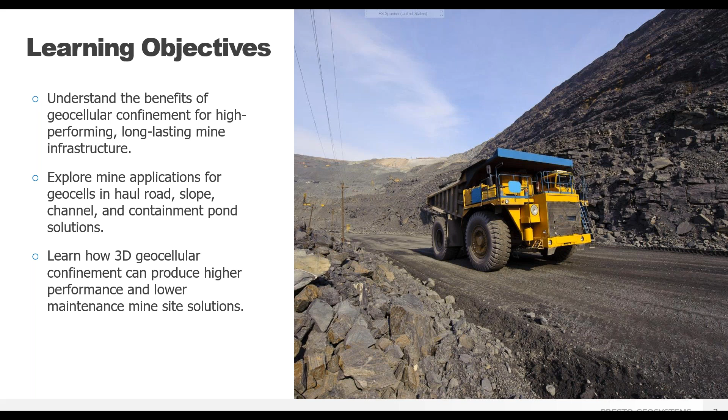What is value engineering? First thing most people think of when hearing value engineering is cutting costs. And although cost is a major project factor, value engineering has to be about maximizing value, not simply reducing cost. A reduction in cost could result in disproportionate reductions in functionality, and then a cost reduction could result in reduced value. Value engineering identifies opportunities to reduce costs while improving functionality. The aim is to deliver the project's functional performance requirements at the lowest cost, preferably the lowest whole life cost.

For construction projects, this means an investigation of materials availability and cost, construction methods, transportation, project-specific restrictions, plus stakeholder issues and benefits, environmental and sustainability impacts. Adoption of a new and innovative material or method, such as substitution of materials and methods with lower cost alternatives, can significantly reduce costs, but they must do so without reducing functionality. That's where we step in to help you, analyzing that total package for a value engineering mine solution.

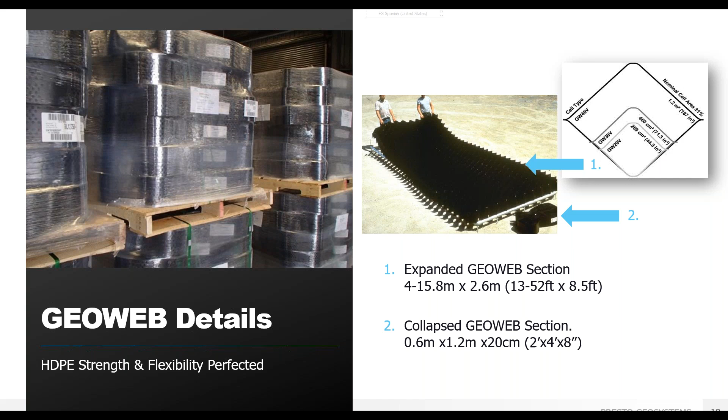The infill, or what you put into that container, is the second important attribute of the GeoWeb system. An important benefit of the system is that low-quality aggregates, sand, or on-site reclaimed material can be used to fill the geocells. Using reclaimed sand or aggregates can save a significant amount of money on materials and transportation costs.

We can also remove fines if drainage is desired, as the geocells provide the confinement and aid compaction of cohesionless soils. Without fines, we can significantly improve drainage and let water flow freely through the system, preventing pore pressure buildup and overall cross-section failure.

The ability to use those low-quality sands and aggregates with friction angles in the 20-degree range really sets the GeoWeb system apart from geogrids and geotextiles. Those products require high-quality materials with high friction angles to achieve their optimal performance. With the GeoWeb system, materials with low friction angles are fine, as the GeoWeb panels reach their full potential even with these poor materials, which can provide significant cost savings to you. The GeoWeb system can often reduce the cross-section required by half.

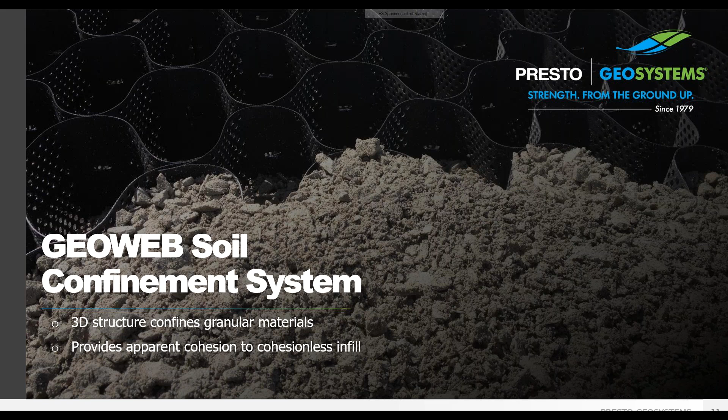In order for a geocell system to perform uniformly, it's critical that both the factory welded junctions and the field joined junctions that connect individual panels perform at a level commensurate with that of the cell walls. The 3 primary elements of the system, the cell walls, the internal junctions and the connectors, have to perform uniformly as a complete system. So any incremental improvement in one characteristic, such as cell wall stiffness or ESCR, is only valuable if a complementary improvement has been made across the other components of the system.

GeoWeb is manufactured using a proprietary blend of high-quality virgin HDPE. Our proprietary formulation has stood the test of time for more than 40 years. And for most typical sites, GeoWeb will retain its durability for greater than 100 years, with lab testing indicating 149 years without degradation, even at full exposure to the elements. We stand behind our numbers so you can deliver certainty in the solution and build with quality materials you can trust. Additionally, GeoWeb and all our accessories are 100% made in the USA under strict quality assurance and environmental control processes.

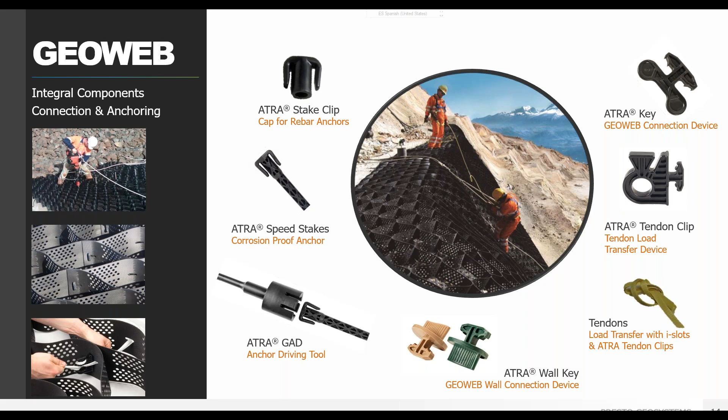The system components are all the supporting pieces that help the GeoWeb protect the surface and base layers and also ensure relatively uniform performance of the interconnected system, thereby protecting against the damaging effects of non-uniform deformation and differential settlement in response to applied loads. The components make it safer, faster, and easier for installation.

The ATRA-key is the first component for a completely integrated system, connecting each individual panel of GeoWeb into a single web that covers your slope. It allows for faster installation of GeoWeb and will last the lifetime of the project, ensuring that the GeoWeb system will not fail under anticipated loads. The specific engineering values of the ATRA-key will ensure the system holds up to loading over time without the corrosion seen in staples or the failure of underperforming cable tie systems.

Our spec sheet calls out the specific engineering values for this patented connector, and the ATRA-key requires no special tools, generators, or compressors like staplers would, nor any three-handed acrobatics like cable ties or two-piece connectors. All the power of the ATRA-key with a simple insert and turn positive connection.

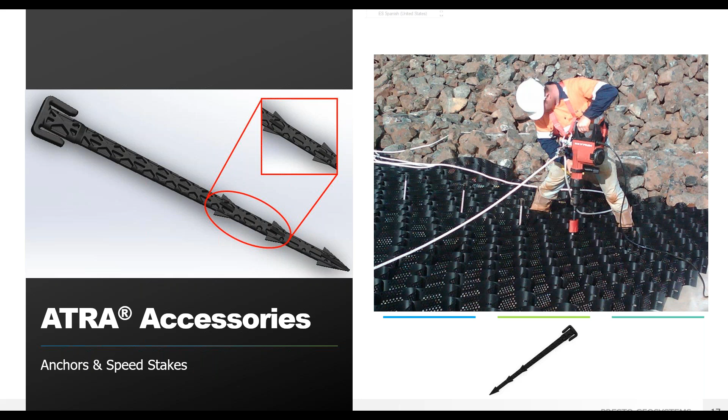For steep slopes, a slope where the native soil is highly erodible, or over a surface that cannot be punctured, such as a liner, tendons can be used. The ATRA tendon clips transfer the load from heavy infill material to the tendons and crest anchorage system. Only the ATRA tendon clip is specifically designed to fully transfer safely and securely the forces placed upon the geocell.

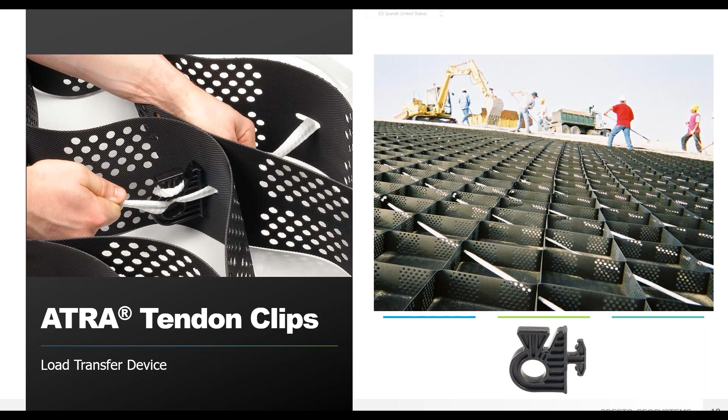Every accessory and every feature has been designed and tested to specifically work together, so we go from problem to design to construction solution with a system where the modeling replicates real-world forces. Now let's talk about how to take advantage of the benefits of geocell confinement. The first application we'll highlight is in load support.

The GeoWeb system stabilizes unstable soils, vertically and horizontally, and in load support applications offers various benefits for mine clients. GeoWeb geocells were invented for supporting heavy loads over soft soils, the perfect solution for haul roads in mine installations. Before giving some specific examples with case studies, I'll explain how and why GeoWeb geocells work so well for load support.

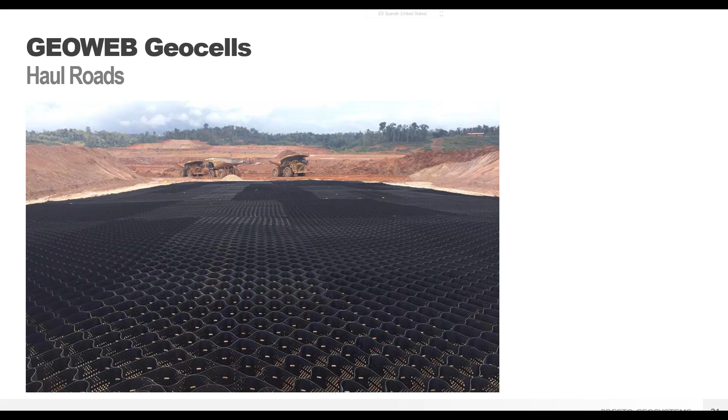GeoWeb was invented for solving a military problem: how to cross beaches with heavy military equipment. The Army sought a quick-to-deploy road solution, and a Presto engineer, Gary Bach, collaborated with Steve Webster of the Waterways Experiment Station to weld strips of polyethylene and form the first geocells.

The system evolved to include UV stabilization and other improvements such as perforation, texturization, and connections, but the concept of geocellular confinement and the particular strength properties of HDPE have been proven by more than 4 decades of GeoWeb load support. Likewise with the use of low quality and low friction angle infill.

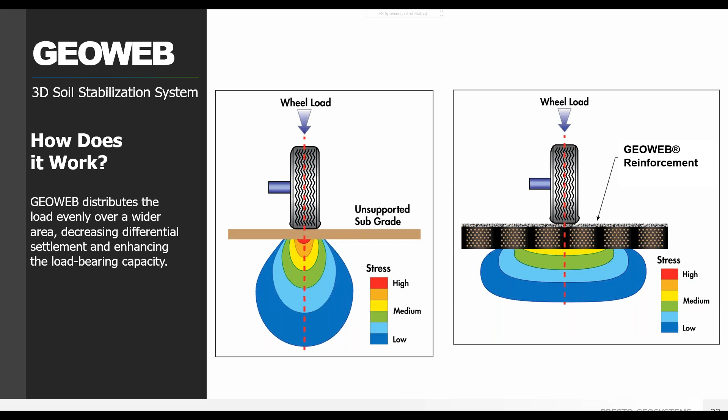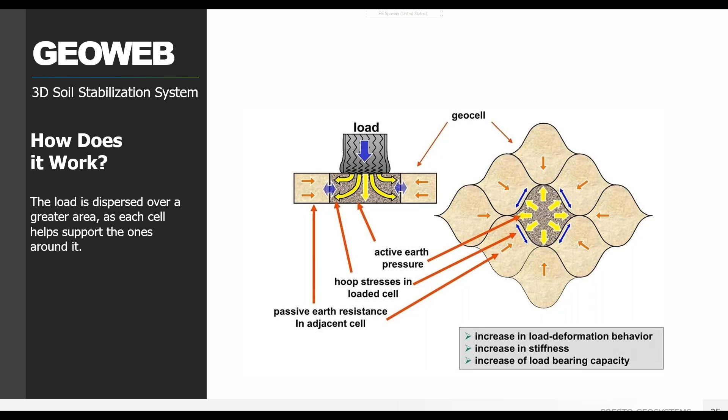The strength of the seams around each cell, the material properties of the individual strips, and the connection method between panels are all important factors in determining how the geocell system can improve load-bearing capacity. Strong seams, semiductile resin properties, and integrated connections are all critical to a well-performing system. By eliminating that lateral particle movement, the GeoWeb can stabilize the surface, eliminating the need for constant maintenance.

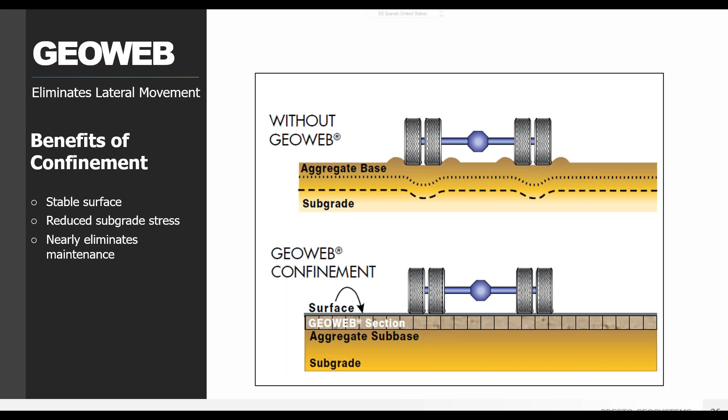Here we see the impressive load support benefits of a standard AASHTO H25 loading parameter, 80,000 pound loaded dump truck, on a partially filled GeoWeb panel over a soft subgrade. We see how the cells push back against each other to help support that load, and only the adjacent cell needs to be filled for that support. A great benefit to using the GeoWeb system is you do not need to have every cell completely filled before your road is usable. You can reduce construction time and materials with this approach.

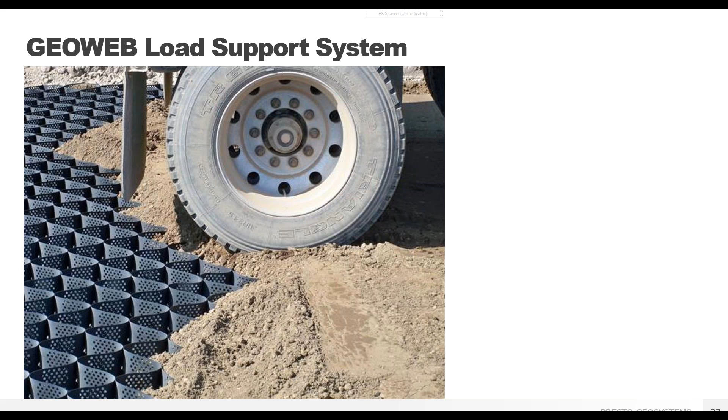The GeoWeb system provides less rolling resistance, less required maintenance, less expenses needed for fuel, and less structure required to support those loads, all with better production, better cycle times, better operational costs, and better installation. A great value engineering solution for your site access and haul roads.

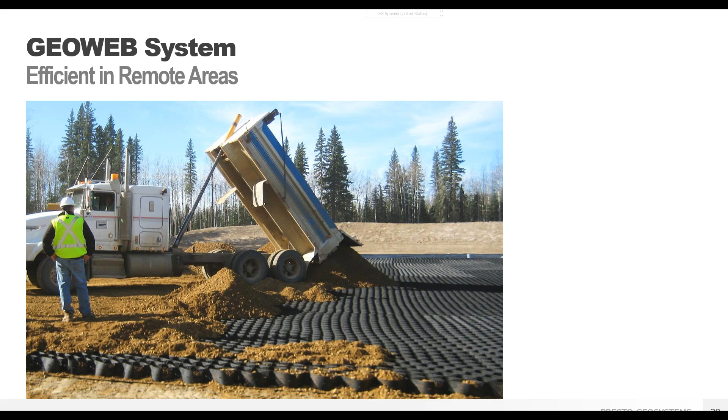The 3D structure functions well in remote areas where clean aggregate is scarce. Compact GeoWeb sections ship efficiently to job sites and require less trucks to transport the materials. On-site sand infill, in this example, is used so that costly aggregates won't be necessary. Nearly any locally available granular infill, sand, or even waste rock could serve for the GeoWeb geocells in your projects. In the majority of cases, the GeoWeb system can also reduce the cross-section depth by up to 50%.

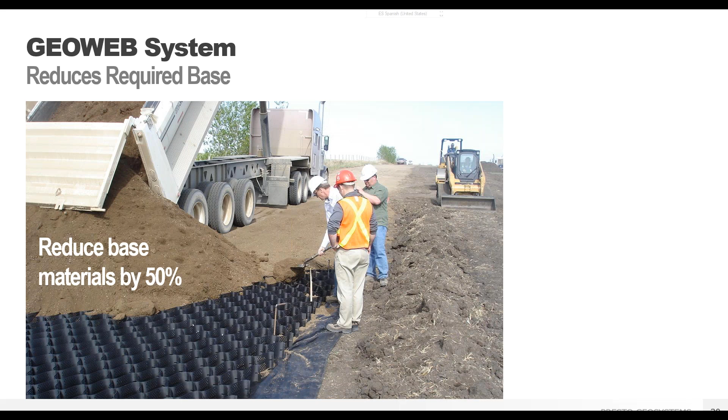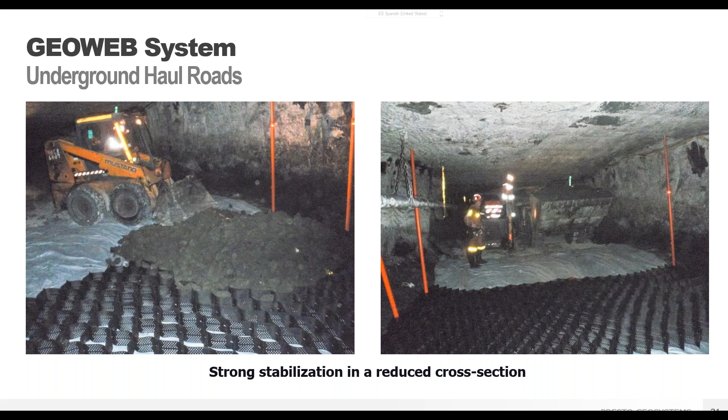GeoWeb allows stabilization with a reduced cross-section, ideal for your underground haul roads. Let's look at a haul road example for a specific case study. This case study is for a mine in South America and a great example of the power of geocells for a value engineering solution.

GeoWeb geocells were incorporated into the design of the haul road at an active mine in Suriname, with heavy loading over soft subgrades and a local scarcity of quality angular aggregates. The prepared subgrade strength exhibited a California bearing ratio, or CBR, value of 2.5%, consisting of saprolite and clay.

Anticipated loading included the CAT 785 haul trucks, which are 275-ton vehicles, and the haul road useful design life of 10 years at 250 movements per day. Geocells offered a value engineered design option with multiple benefits. The sticky clay soils made the road impassable with every hard rain, and adequate aggregate materials for a standard construction solution were not to be found.

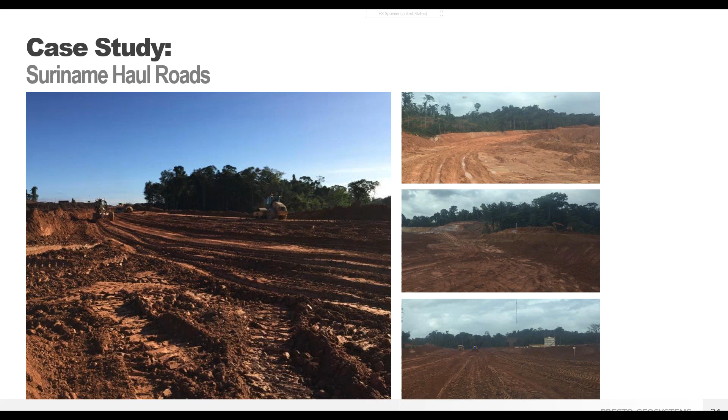GeoWeb geocells offered that value engineering solution with just one layer of 6-inch or 15-centimeter geocells, being able to support the heavy haul truck loading over soft subgrades and reduce the total thickness to 30 inches, reduced from the 60 inches suggested by standard design guidelines.

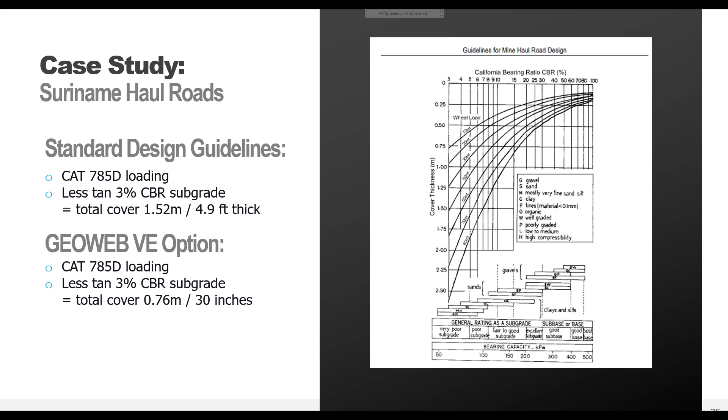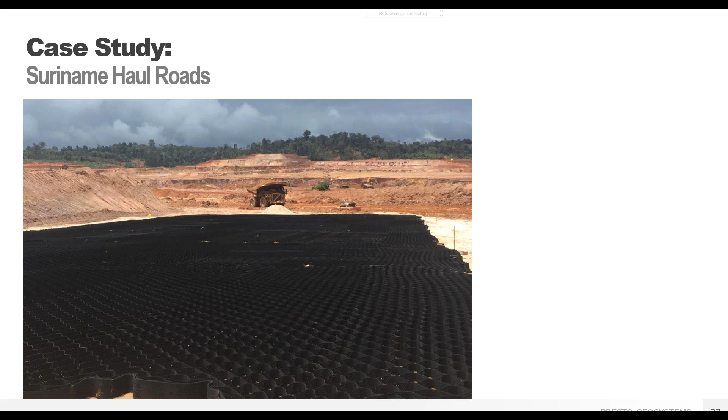Geocells dramatically increase the shear resistance of the infill, which allows the use of lower quality fill to carry concentrated loads that would otherwise require crushed aggregate to prevent localized near surface shear failure. Here's that one 6-inch layer of geocells being installed. For an efficient and cost-effective solution, the infill was locally available coarse river sand, known as small miner's residue, and the GeoWeb haul roads function well, even with the hard tropical rains.

The results of the GeoWeb installation offered notable benefits. A great reduction in the total cross-section needed, reducing it by 35% with a coarse sand wear surface, and by 50% with an aggregate wear surface. The estimated savings per kilometer are around $150,000 US, about $100,000 per mile in savings. Since installation, there has been a reduction in road maintenance costs of over 65%.

There are no downtimes due to rains, and there have not been any deep ruts observed since install, multiple years now. There's less vehicle maintenance and less fuel required, better productivity and operational costs, safer site conditions, and this expansion opened before the scheduled date and under budget. All in all, a very satisfied client.

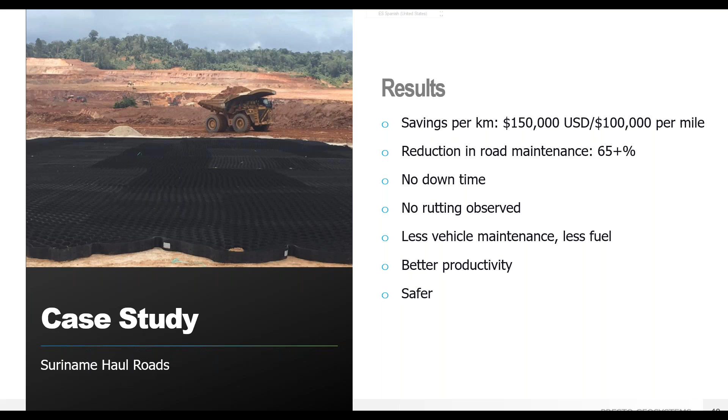Project calculations included an analysis of bearing capacity improvement to evaluate the combined benefits of lateral confinement from geocells in conjunction with the tension membrane effect of the underlying high-strength woven geotextile to confirm the proposed approach would meet design requirements. The analysis indicated the stabilized section would offer a substantial increase in the allowable bearing capacity over existing subgrade conditions, without which it would have an allowable bearing capacity of around 20 to 30 psi at best.

An analysis of hoop stresses under working loads was also performed to verify the geocell system components would be able to withstand the demanding load requirements. Hoop stresses were compared to the ultimate tensile strength of the perforated cell wall, as well as the strengths of the internal and mechanical junctions.

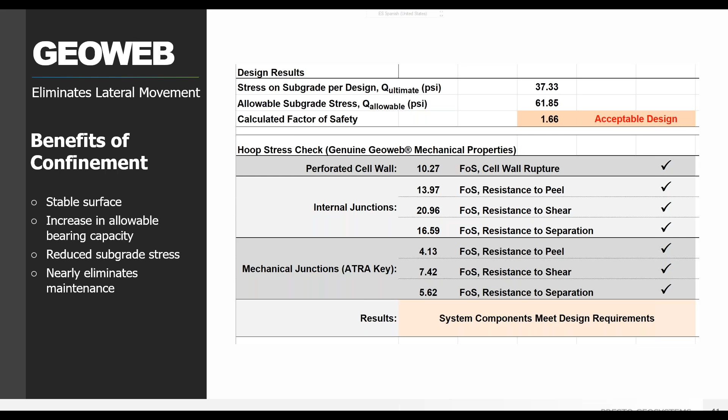In the case of the junctions, ultimate strengths for all three primary modes of potential junction failure, shear, peel and separation or splitting, were compared to the fully developed hoop stress under working loads to calculate factors of safety for each mode. For cell wall, the factor of safety against cell wall rupture was calculated. As shown, all of the system components were verified to meet the design requirements.

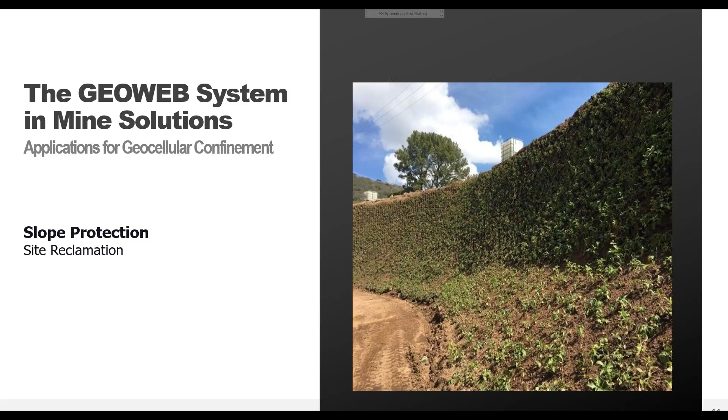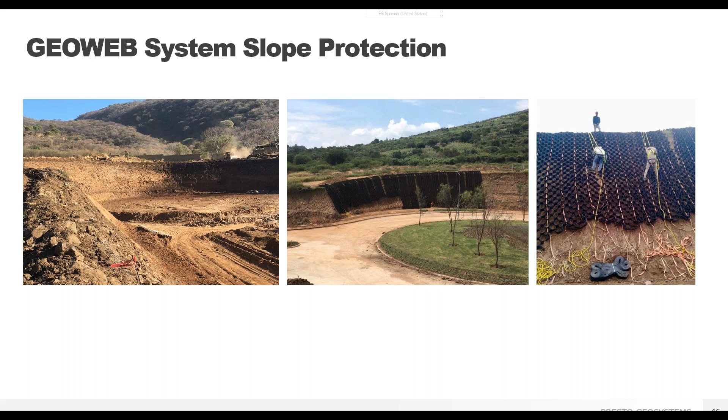Our next application for GeoWeb will be for slope protection. The GeoWeb system stabilizes unstable soils, and in slope protection applications, that means we can control erosion while at the same time sustaining vegetation with steep slope angles. The GeoWeb system allows flexibility in a mine slope reclamation solution and allows vegetation of tall, steep slopes that would otherwise not be able to sustain vegetation.

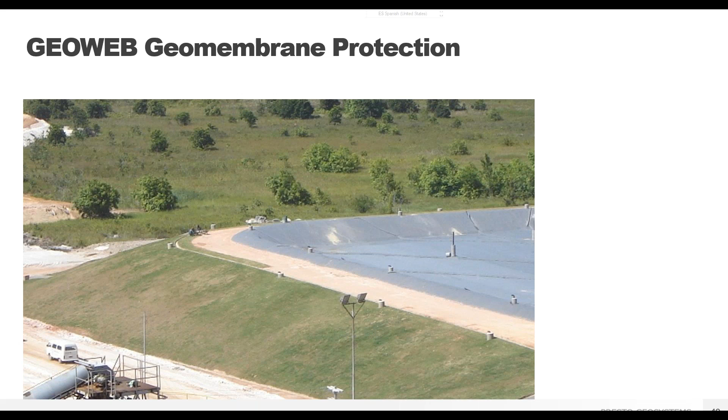GeoWeb also allows you to suspend a protective layer to vegetate or to hard armor over geomembranes without the need to perforate the liner for anchors. And as you see here, it's able to sustain vegetation and control erosion in that protective layer. Here's another example of the GeoWeb system with tendons over geomembrane.

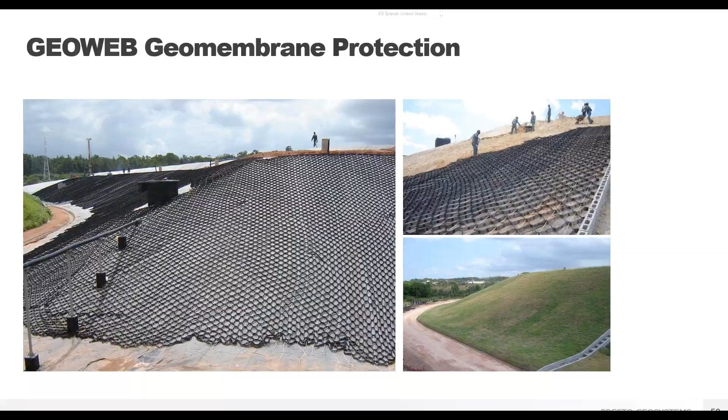The anchorage system with ATRA tendon clips allows for a safe and strong installation without the need for anchor stakes or perforation. The ATRA tendon clips transfer loads from the geocell wall to the tendon and the tendon to the crest anchorage, whether that be deadman pipe as you see here or a type of earth anchor.

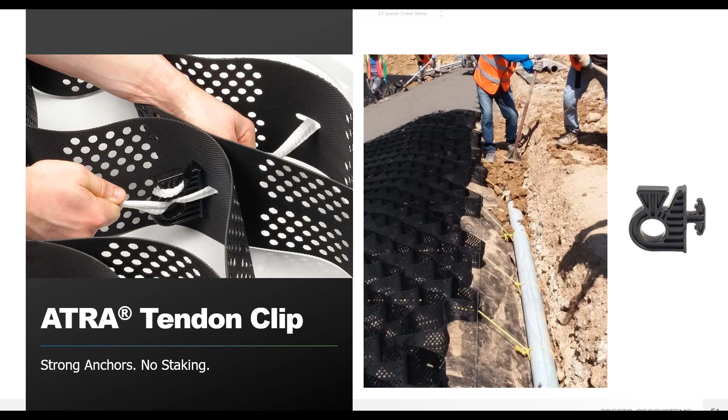Here's a case study from a mine slope at the foothills of the Canadian Rockies. The soft shale slopes were degrading with noticeable scour and erosion in an area above an MSE wall supporting a new coal conveyor. A long-term stabilization solution was critical for this project. We worked closely with the engineer of record, assessing system options to include anchorage for the loadings, for snow loadings.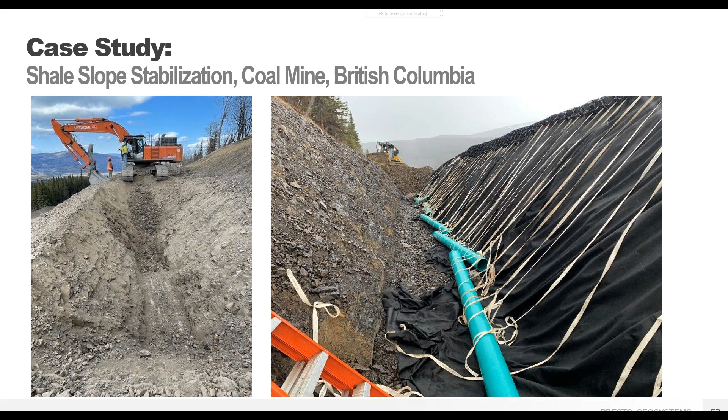A tendon GeoWeb system was designed with the ATRA tendon clip load transfer devices and a deadman crest anchor for this 1.4 horizontal to 1 vertical cut slope. Here we see the tendon tie-off in the anchor trench, as well as the non-woven geotextile for separation. Here the anchor trench is filled with on-site material, and you can see part of the conveyor system at the toe of the slope in the photo on the left.

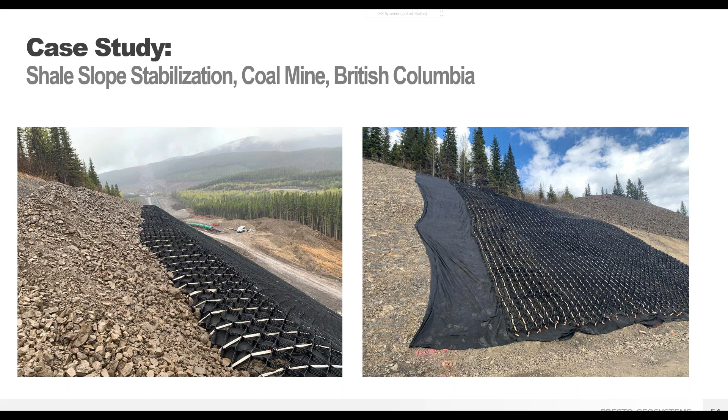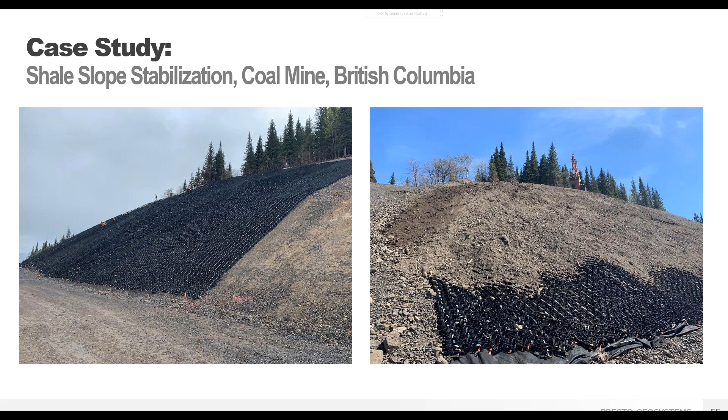Much of the GeoWeb slope protection system can be pre-assembled on the crest of the slope and then expanded downslope for infilling. Once the GeoWeb slope system is connected and placed, it is infilled from crest to toe. The GeoWeb sections were filled with topsoil, and the area was seeded for vegetation growth.

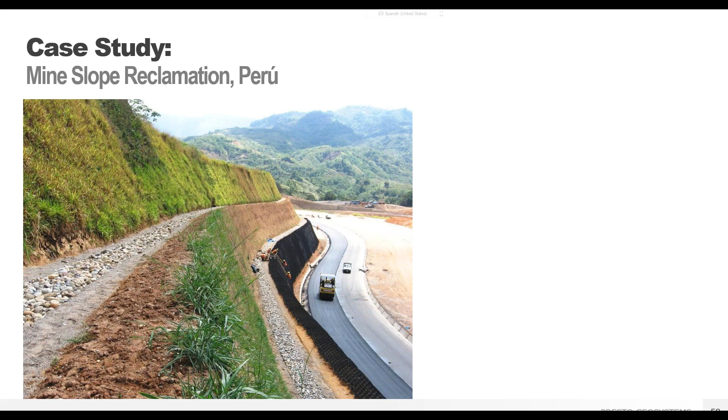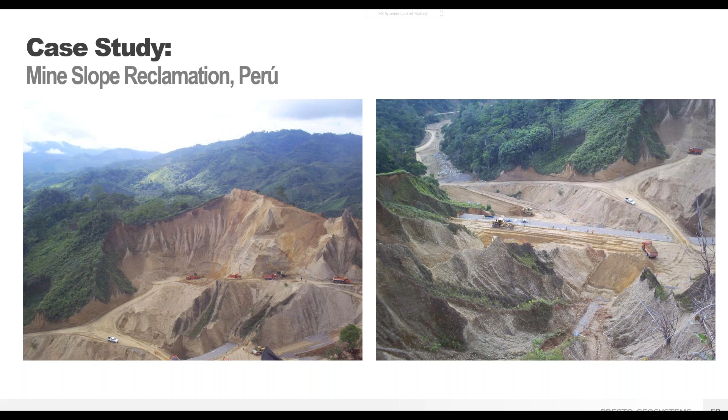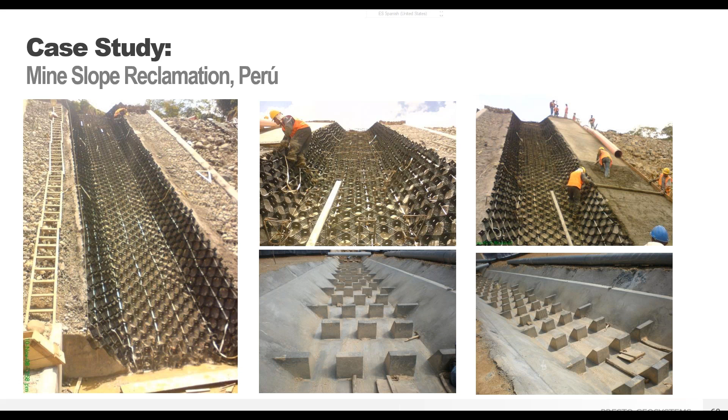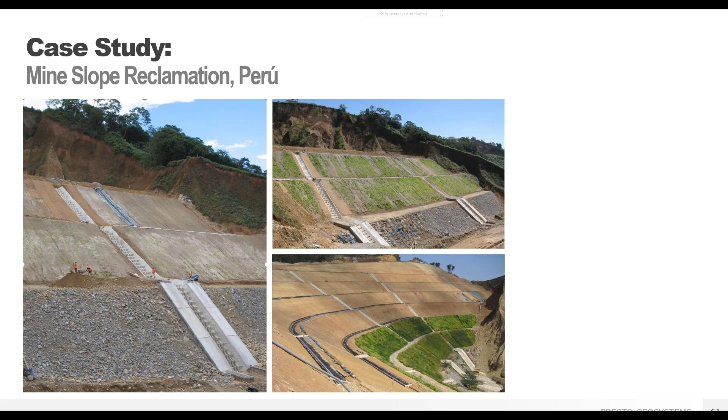Here's another case study for mine slope reclamation, this one in Peru. As you can see, the slopes are very steep, with cut slopes having angles greater than 70 degrees in some cases, and much erosion. A complete and complex solution was required, including the design and construction of integral rainwater channels with energy dissipators, all with the goal of managing stormwater and preventing slope erosion with little to no maintenance long term. Long-term protection and a complete solution to control erosion, reclaim mine slopes, and control stormwater, all thanks to the GeoWeb system.

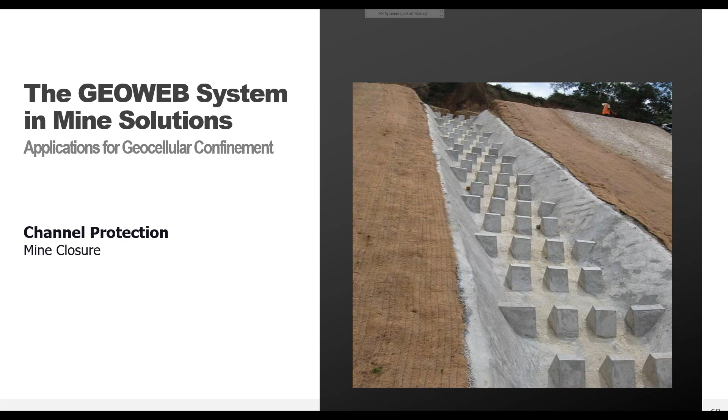The process for building up a channel protection goes something like this. To begin, we have our channel with standard dimensions and side slopes. Depending on the infill, a geotextile separation layer may be required. Then the GeoWeb panels are put in place. Note how the panels typically have a crest anchorage at the top of the side slopes, as well as a horizontal turn at the top. This is important for the anchorage and to prevent water from flowing under the panels and scouring it.

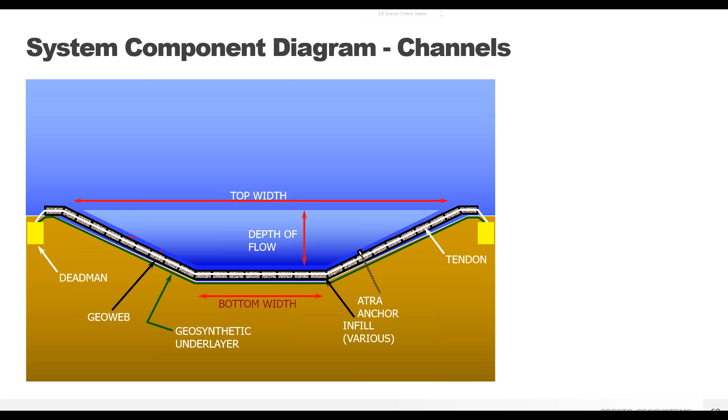The use of the 3D GeoWeb channel protection system is much more effective than two-dimensional solutions that are subject to scour or lifting. The fill material that's confined in each flexible cell is protected against erosive forces, making the entire channel or embankment more stable. Two-dimensional solutions such as erosion control blankets or cementitious blankets do not protect the channel from the hydraulic forces of the water, so the channel can fail even with that 2D protection system in place. Those systems also may be prone to uplift.

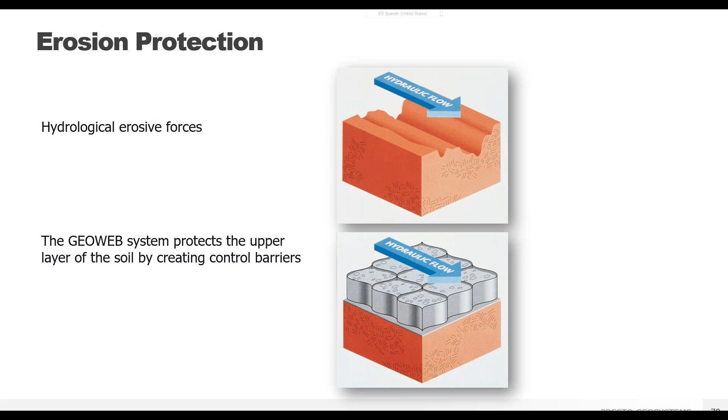The GeoWeb channel system provides protection with a variety of anchorage and infill options that best suit your project needs. Here we see channels with vegetated infill, aggregates, and concrete. Geocells improve the hydraulic performance of conventional channel protection materials. Presto has done extensive testing with the hydraulics lab at Colorado State University.

And their lab has a static drop of over 80 meters, about 260 feet, for nearly limitless flows through their lab flumes.

The CSU tests gave us formulas to calculate solutions for flows in vegetated GeoWeb channels up to 9 meters per second, or about 30 feet per second, in aggregate channels, reducing rock size by 2 to 10 times compared to riprap and the Abt-Johnson or U.S. Army Corps of Engineers formulas, and in concrete channels with flows of more than 11 meters per second, or over 36 feet per second, with the GeoWeb system surpassing the flow limits of the lab flumes.

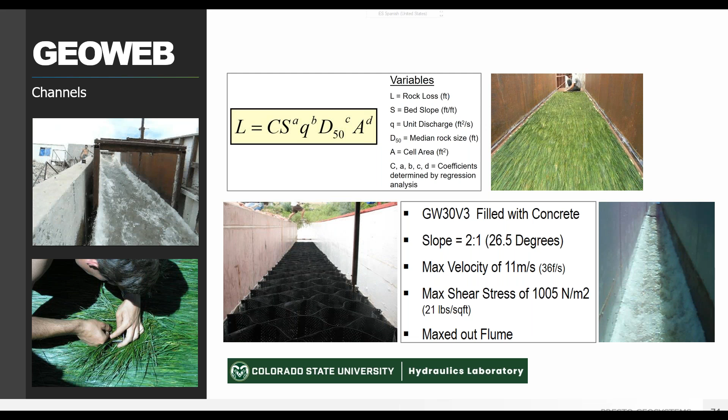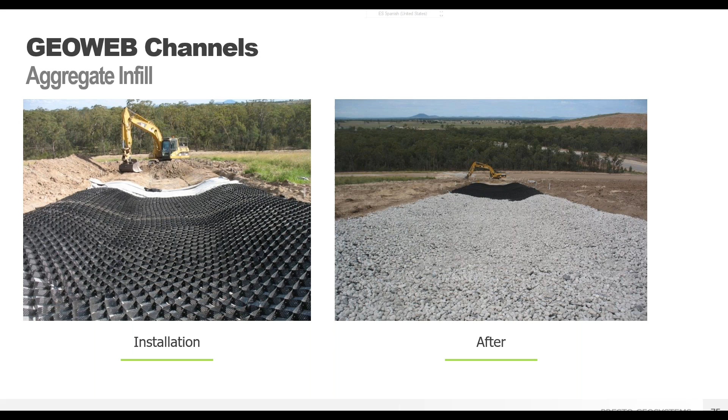Vegetated channels are not typical solutions for mine installations, and aggregate channels are often used for mild slope installations, like this example of an outfall channel for Rio Tinto. Or this example with shallow embankments in Arizona. The GeoWeb channel infill can be waste rock, readily available on site, and less costly than importing any fill.

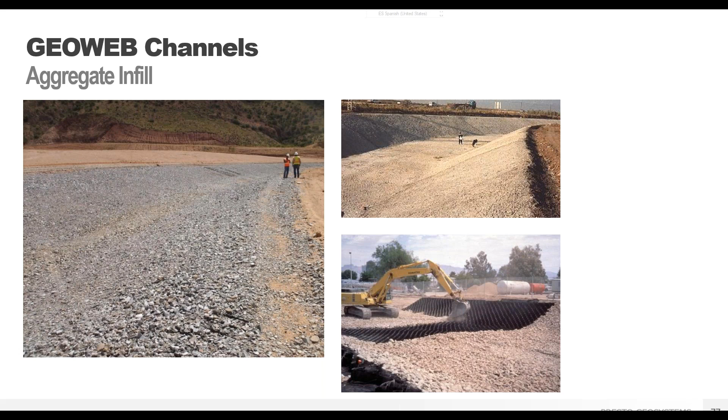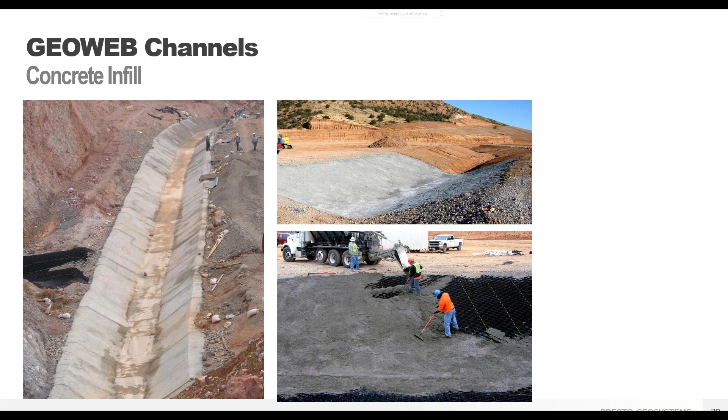For extreme flows and a permanent worry-free solution, concrete infill is recommended, as used in this spillway project in Peru. That concrete recommendation is especially important at mine closure or when limited site observation and access is available. Here are some more examples for remote site installs from San Andreas and Tyrone. And there are many, many concrete GeoWeb channels at the Yanacocha mine sites.

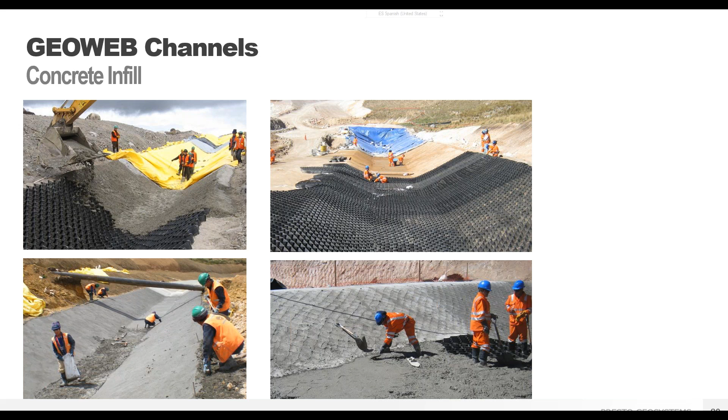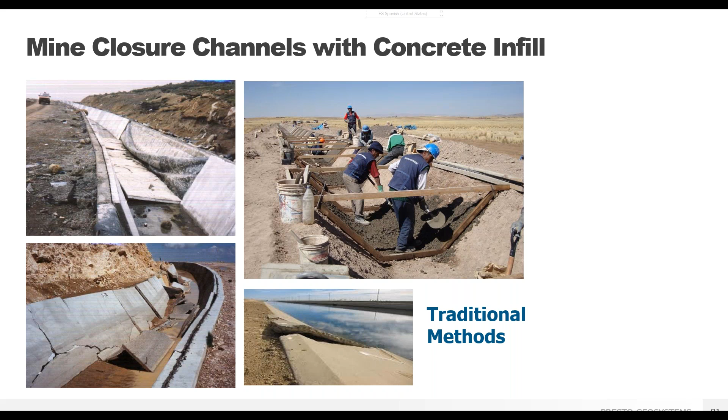Traditional methods often open the possibility to failure points, in addition to having longer construction times. If there's differential settlement or seismic activity along the channel, an inflexible solution should not be chosen. We're going to look at a case study for a high flow mine channel in Guatemala. GeoWeb allowed for a resilient and fully armored seamless channel without the need for expansion joints and the potential failure zones seen with traditional poured channels, all with a reduced cross-section in an active seismic zone.

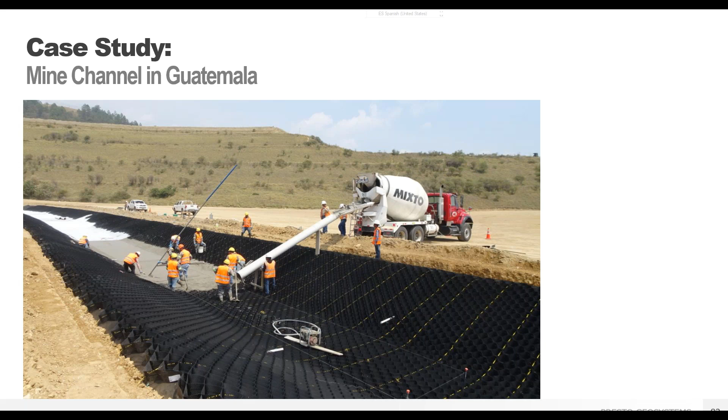GeoWeb geocells can be incorporated to handle high-flow stormwater in remote locations, and their long-term resiliency makes them ideal for mine closure applications where environmental restrictions hold sites to consistent and permanent high performance. Yet site access often only allows for occasional monitoring post-closure.

Expanded durability standards are especially important with increased frequency of record storm events, and if either seismic activity or differential settlement is expected. As our case study will discuss, this mine site in Guatemala experienced record storms and strong seismic activity, and the geosynthetically enhanced channel armoring delivered consistent performance that stood up to the challenges.

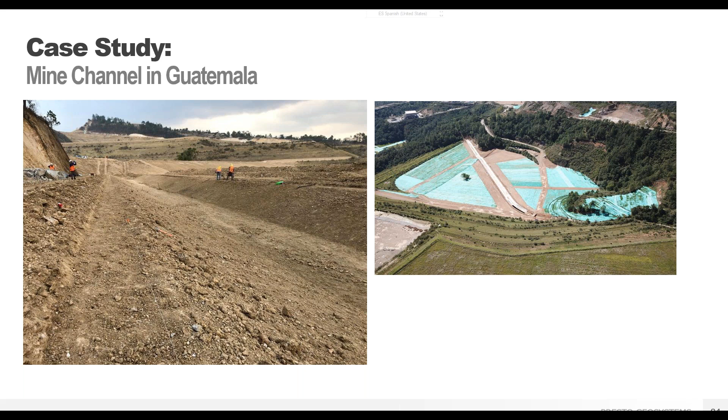The channel had anticipated hydraulic flow of 425 cubic feet per second, about 12 cubic meters per second, and about a 5.14 meter per second velocity over a length of 400 meters. There were rapids included in the channel, and the client wanted to allow for excavator entry as needed for future cleanout. The mine site was originally considering an 8-inch or 20-centimeter reinforced poured concrete channel and looked to optimize design while maintaining a trapezoidal channel formation.

While design calculations supported a 4-inch geocell system to still allow that excavator support and match the resiliency needed for this channel, the mine site preferred to split the difference with a 6-inch depth for additional factor of safety. This was still 2 inches thinner than originally budgeted, so it already offered considerable savings in concrete costs.

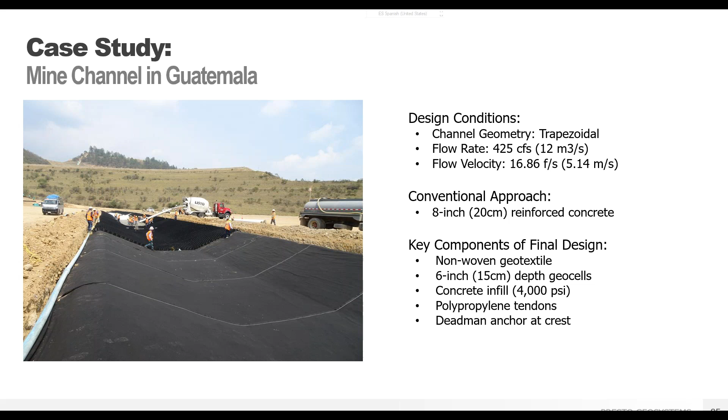The design included a non-woven geotextile as a separation layer, 6-inch geocells with polypropylene tendons, and a load transfer system with 4,000 psi concrete. The GeoWeb channel protection design incorporated our strong polypropylene tendons, the ATRA key connectors, and the ATRA tendon clip load transfer devices. Here you see the connection with the deadman anchor with the tendons.

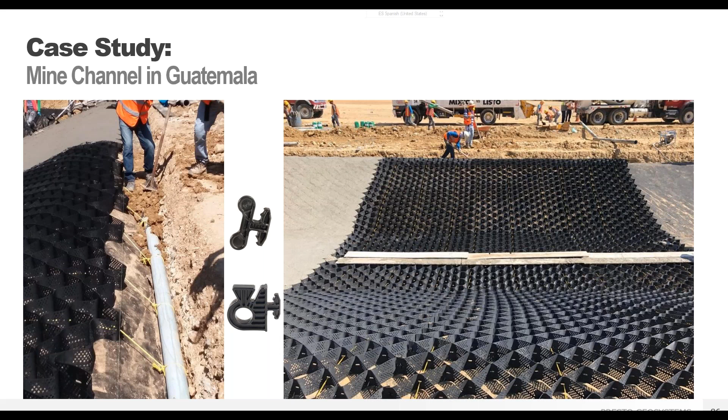First, the channel bottom was filled, and then the side slopes working from top to bottom. Note the yellow tendons and the deadman anchor at the crest. These components are determined project by project based on the details of the specific channel. Also note the difference in concrete color, with a previous pour showing as the light white infill color and the current pour showing as the darker gray.

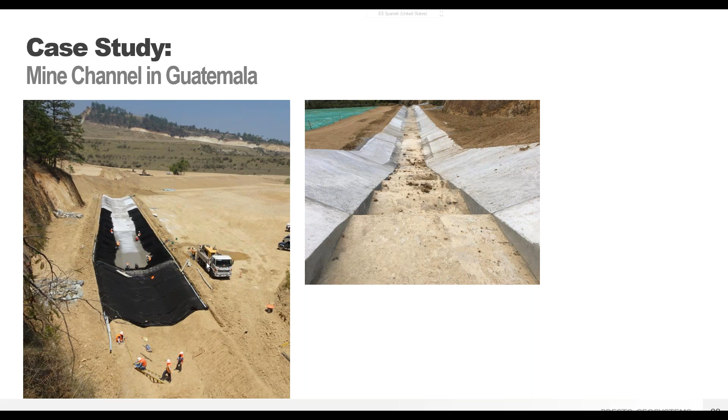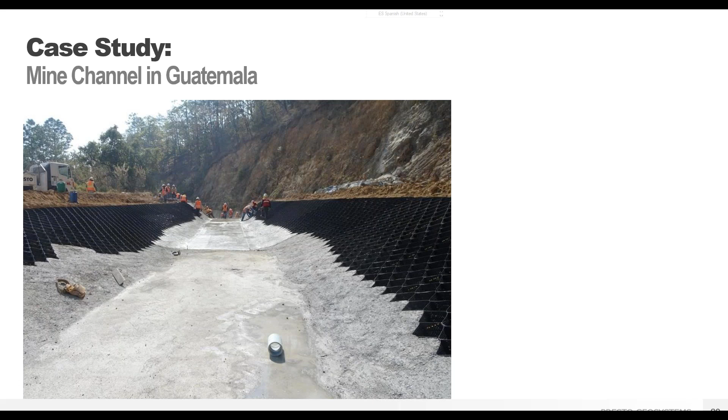Rapids were incorporated into this part of the channel design, with the GeoWeb geocells transitioning seamlessly into the structure. And here joining the rapids with the rest of the GeoWeb channel. Again, incorporating multiple pours without any issues of that transition. Here's a drone view of the GeoWeb channel installation with the rapids here.

The GeoWeb channel protection system allowed for a resilient and fully armored seamless channel without the need for expansion joints and the potential failure zones seen with traditional poured concrete channels.

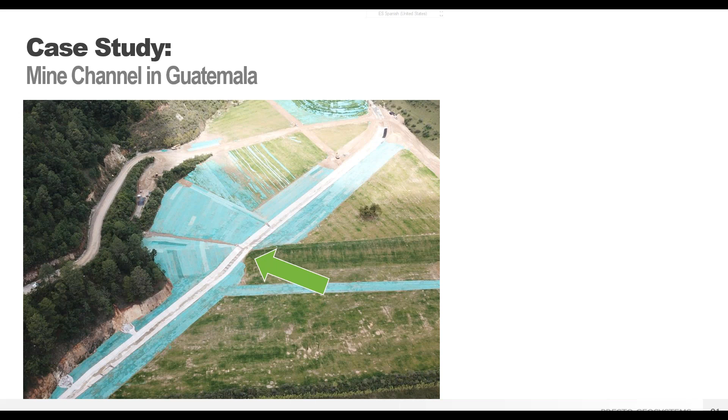After multiple years of performance without incident, even with record storm events and strong seismic activity in the area, with soil saturation, overflowing rivers, and landslides, the GeoWeb channel continues to perform as expected. Geocells with concrete infill have the long-term resilience and economy to be considered a best practice and are considered among the solutions with highest long-term performance results from the U.S. Bureau of Reclamation's 10-year canal lining study.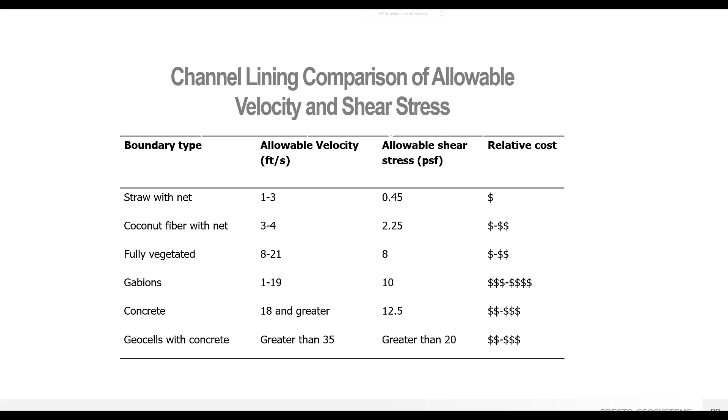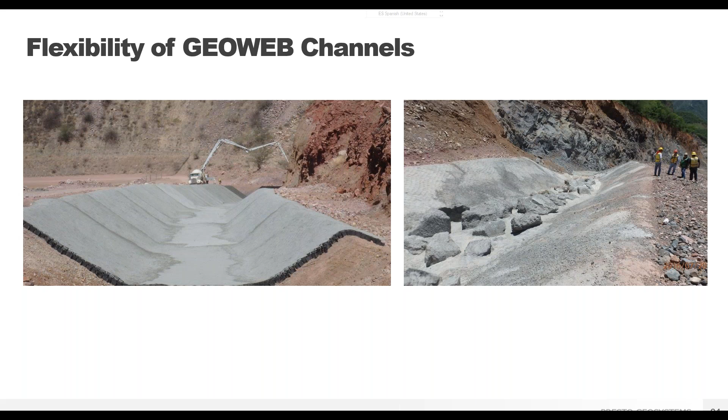Here we see a comparison of allowable velocities and shear stresses for various channel lining alternatives from the United States Department of Agriculture. The GeoWeb system provides protection and flexibility, as shown in this mine closure channel in Mexico, using big riprap fixed in place with grout for a rockfall area. Or with these rapids in a Peruvian mine installation. Again, incorporating those energy dissipators as an integral part of the GeoWeb concrete pour.

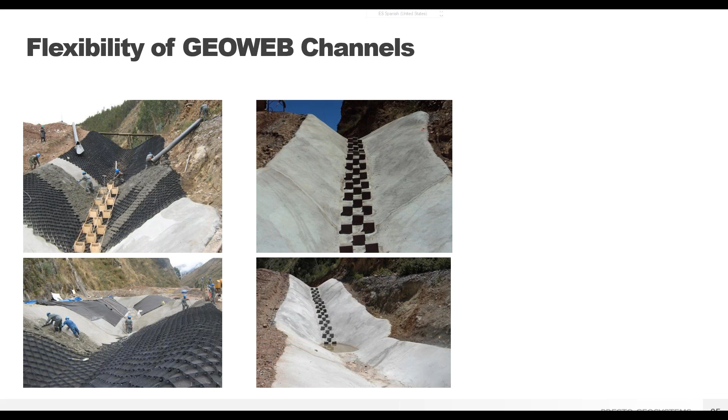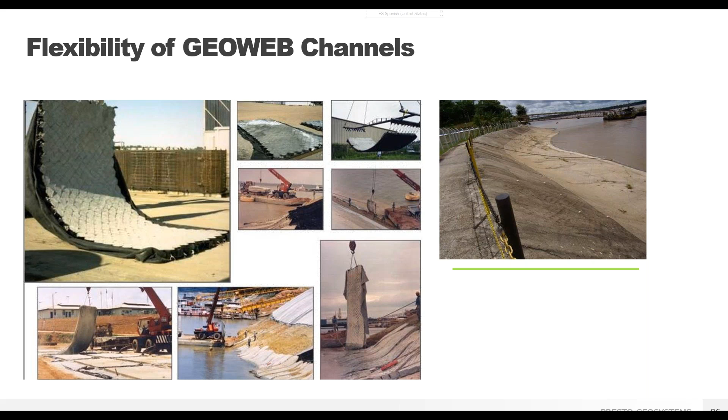The flexibility of channels with various options for anchorage and installation, and various options for infill. All in all, a system of complete channel protection for your project needs.

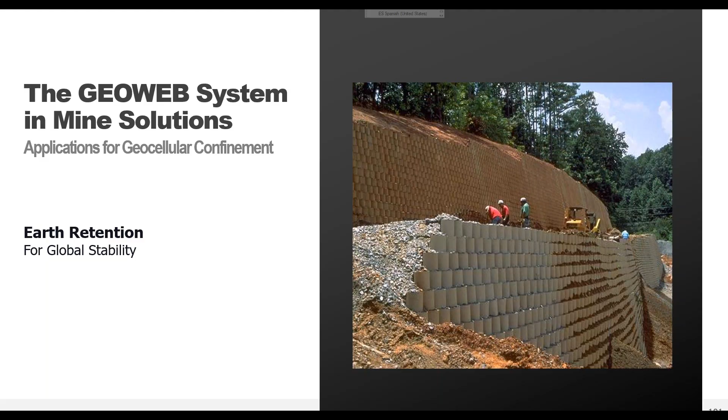Our final application today will be for earth retention systems. The GeoWeb Earth Retention System can offer global stability and support of surcharges, even with seismic activity and differential settlement. Retaining walls serve to contain soils and protect utilities or storage tanks, and can offer global stability for very steep slopes, like this example in Central America.

GeoWeb walls also function as containment dikes, with or without vegetation, and unlike block walls, GeoWeb walls can withstand reasonable differential settlement, hydrostatic pressure, and seismic conditions.

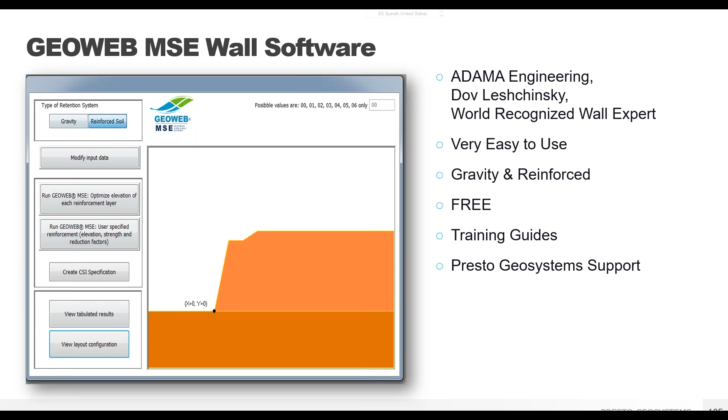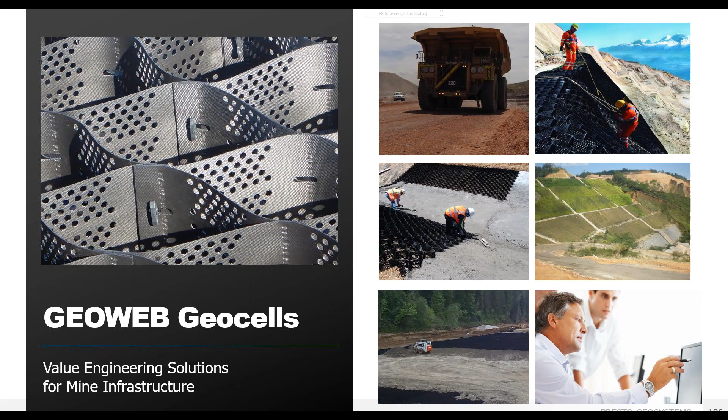The GeoWeb system stabilizes unstable soils vertically and horizontally in the applications of load support, slope protection, channel armoring, and earth retention. GeoWeb offers improvements in operation, maintenance, installation, and safety at a lower total cost, giving your mine site some powerful value engineering solutions. Every project is different, but the Presto Geosystems team has a solution that's right for you. The GeoWeb system can be added to projects to provide a more stable, longer lasting, and flexible system. It's a complete system solution for ease of installation and peace of mind.